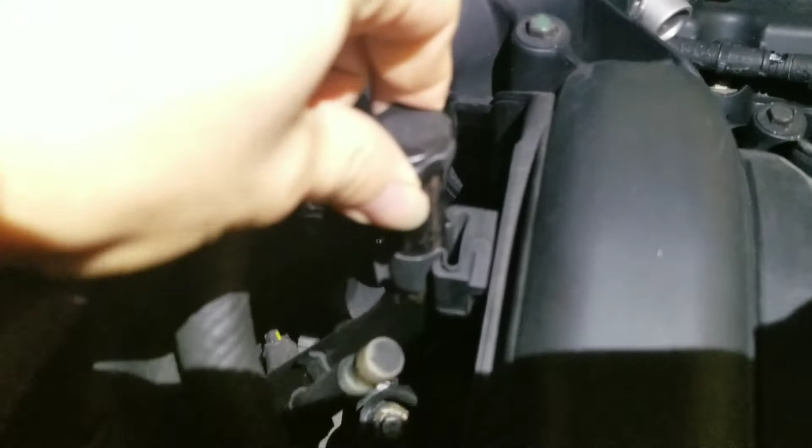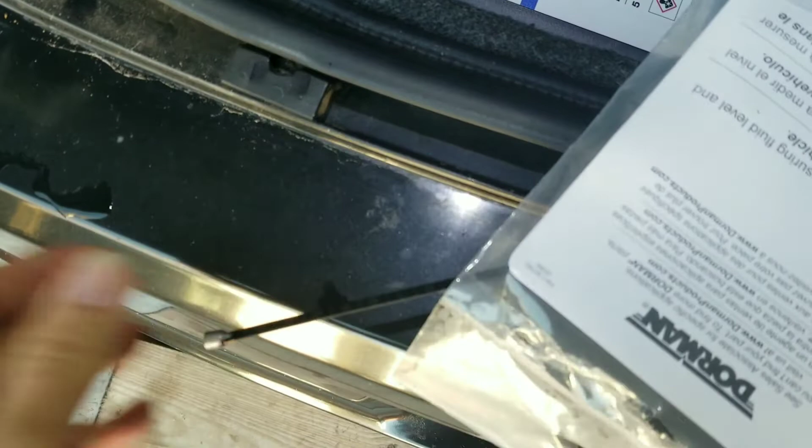Okay, today I will be replacing transmission fluid on a Dodge Charger 2007. As you can see, it says for dealer use only, so there's no dipstick, but I'm going to be using a special dipstick with measurements. Once we start the vehicle, we will be checking the measurements and filling up the fluid accordingly.

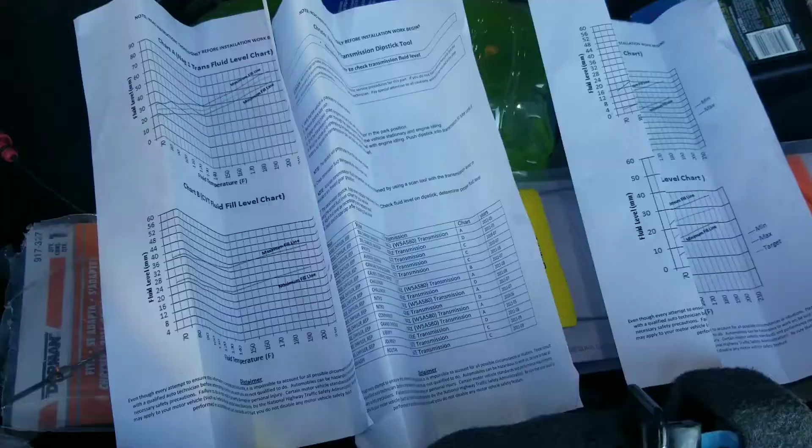By the chart - there's like 3 charts here. These are the charts, and we'll be using chart D because we have a 2.7 liter engine. Okay, so this is how it looks.

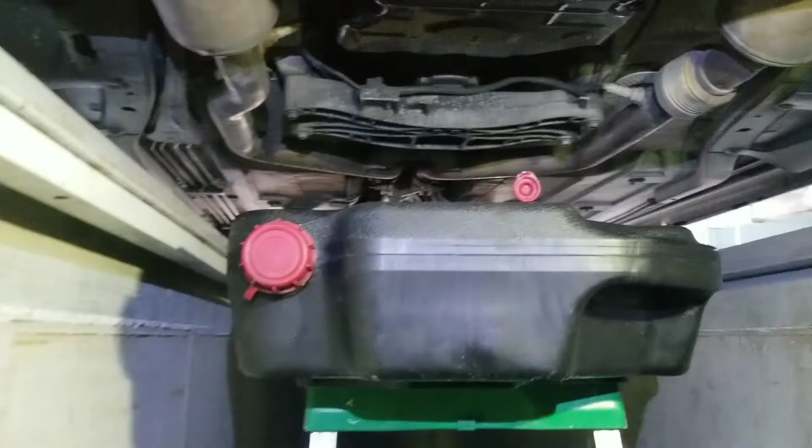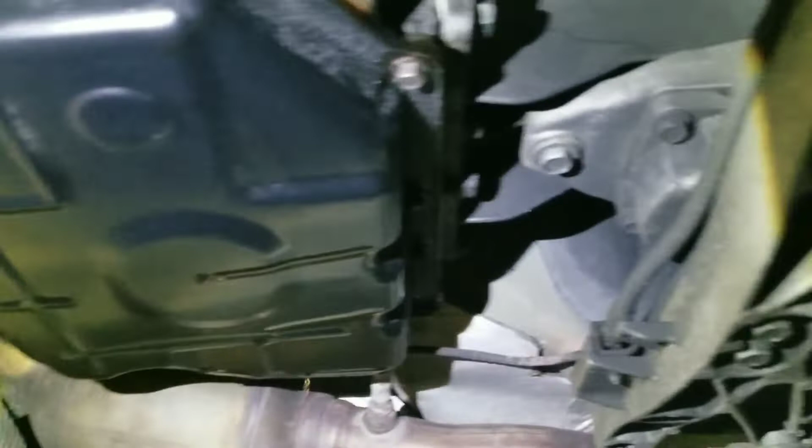Now we'll be removing pretty much all the bolts and letting it drain first into this drainage. So the reason we're doing it is because we got some issues with the transmission - it kind of slips and jerks while you're driving, especially on the highway. This could be the torque converter, but maybe we'll try replacing the transmission fluid first and see if this helps.

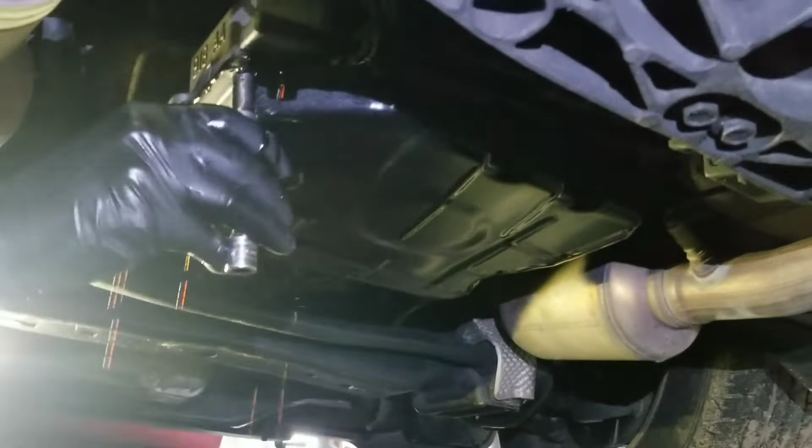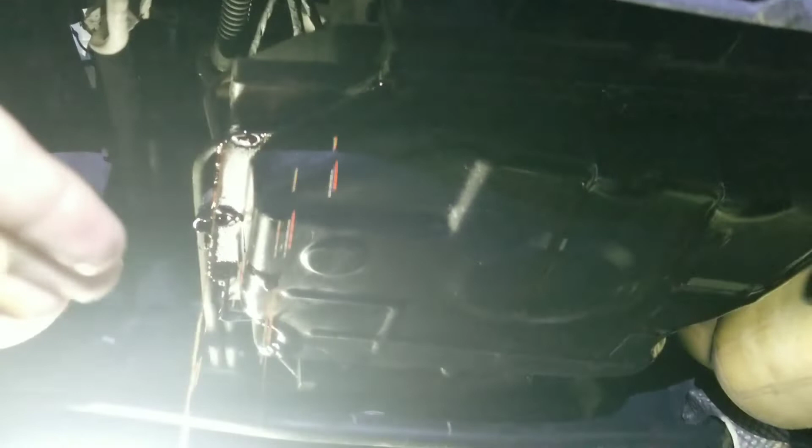Okay, so we will bring this side of the transmission pan down because it's more like tilting on that side - it's kind of tilted this way or something. Maybe not, but I think it's just easier. Okay, now we're removing the last bolt right here. Oh boy, don't spill.

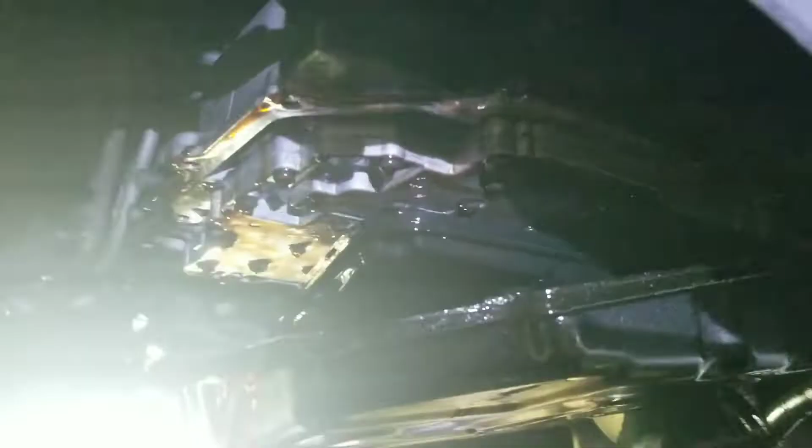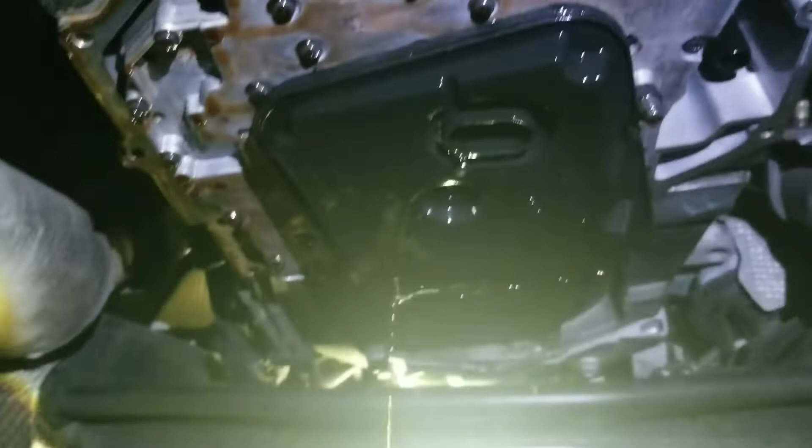And now we can start removing it. Okay, so yeah, it looks like it's dirty - very dirty, it needs replacement. This is interesting how this filter sits kind of at an angle. It's like it has to be straight, I guess, but no, I mean it's sitting right, it's just weird how it's designed.

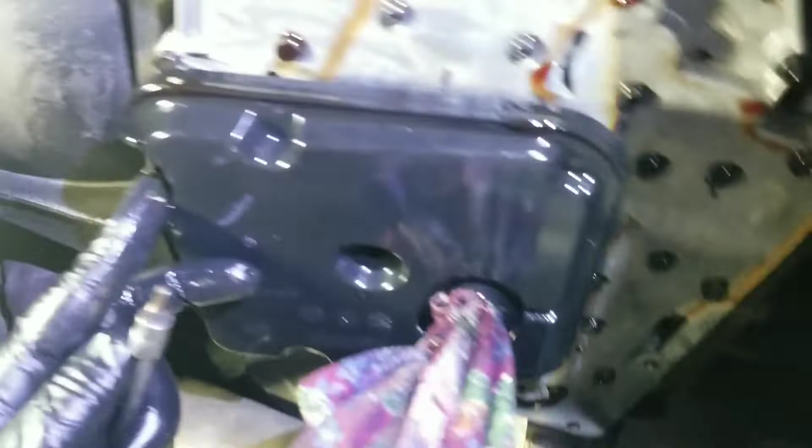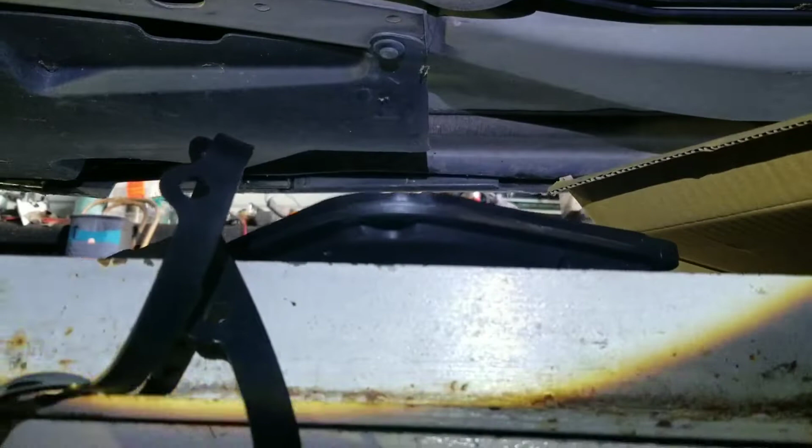Okay, now we're removing the filter - one bolt right here, and the other one's on the right side. Okay, I already removed them. And we got the new one over here. Hopefully it fits - we got it at AutoZone for like $15, and it comes with the gasket.

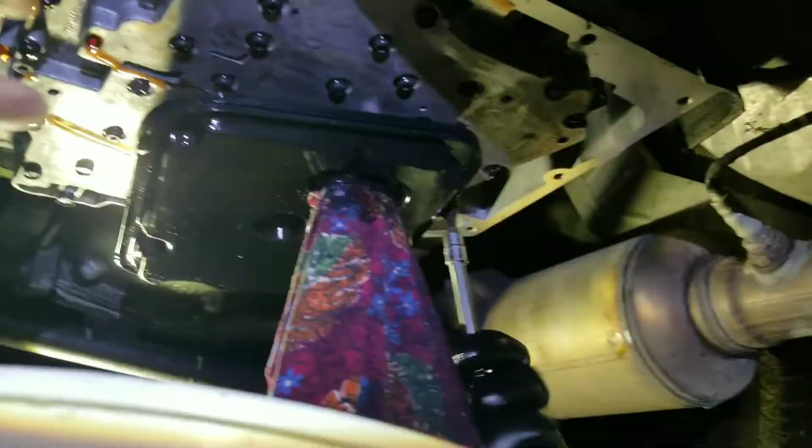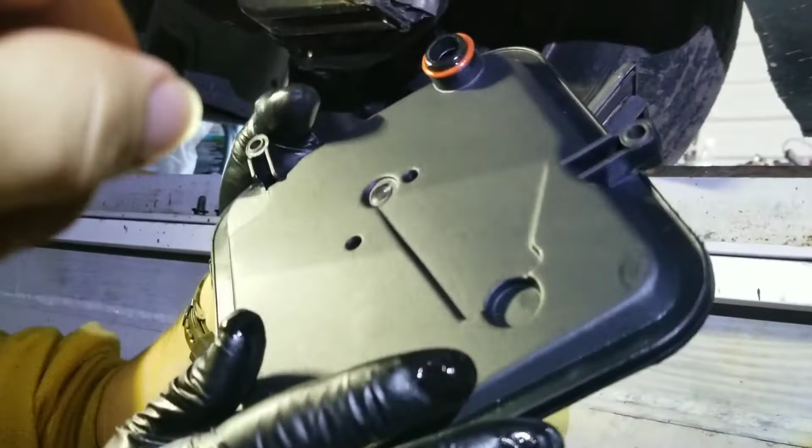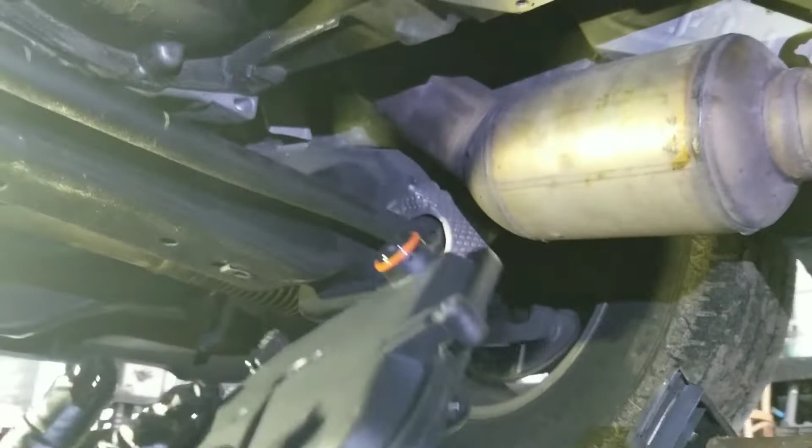Now we're dropping it - it's going too fast, can you hold the bucket with one hand? Okay, so we are installing the new one, and we grabbed some of this oil - you can use a new one. Make sure you pre-lubricate this before installation, then put it back in where it was.

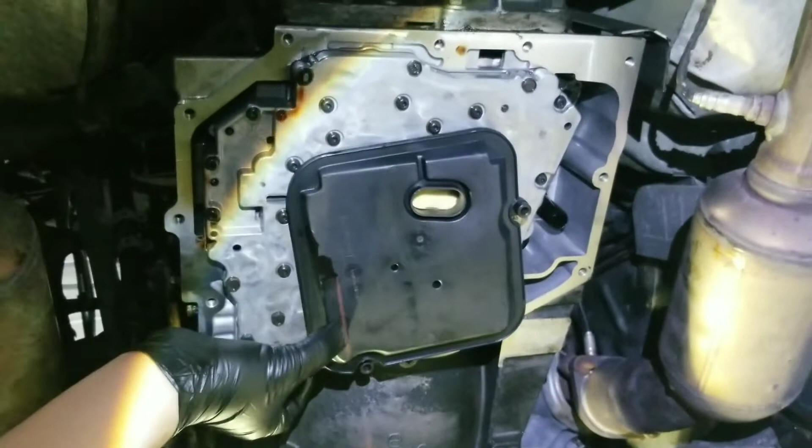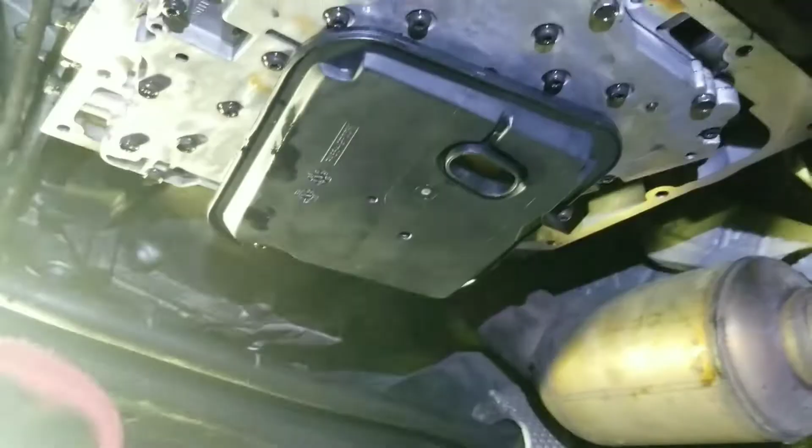Now it's kind of weird how it's located sideways, kind of. Put the bolts back in there, put everything back in - good to go. Okay, so be careful when tightening, just tighten them hand tight. Make sure you don't break them, yeah, because they're easy to break.

So wipe everything out as much as you can, and it should be good. Then let's clean the pan, and especially that magnet needs to be cleaned, the whole thing too - a lot of metallic debris. Okay, here's the gasket.

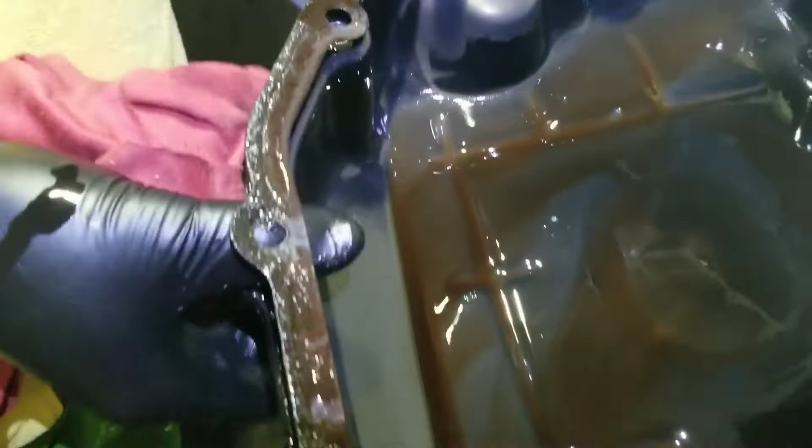It looks very bad - it was looking bad, yeah, the bolts were loose as well. I'm gonna clean it - this is trash. You want to compare with the new one? This is the new one, new gasket.

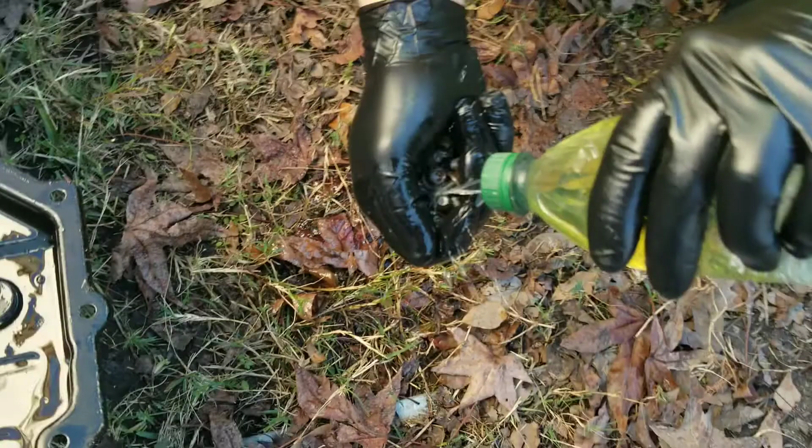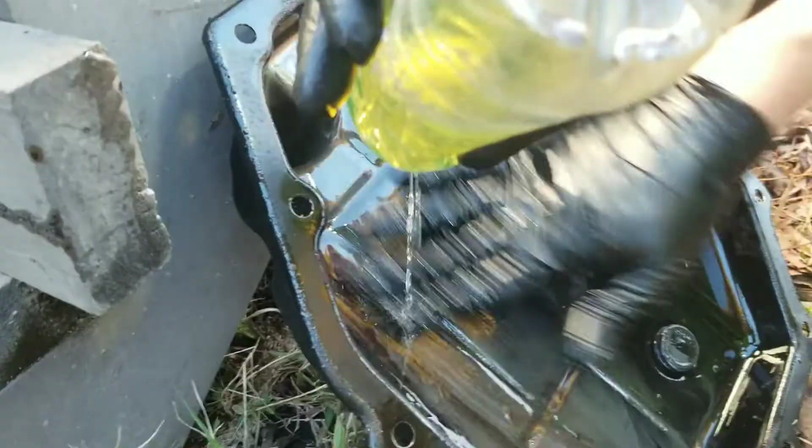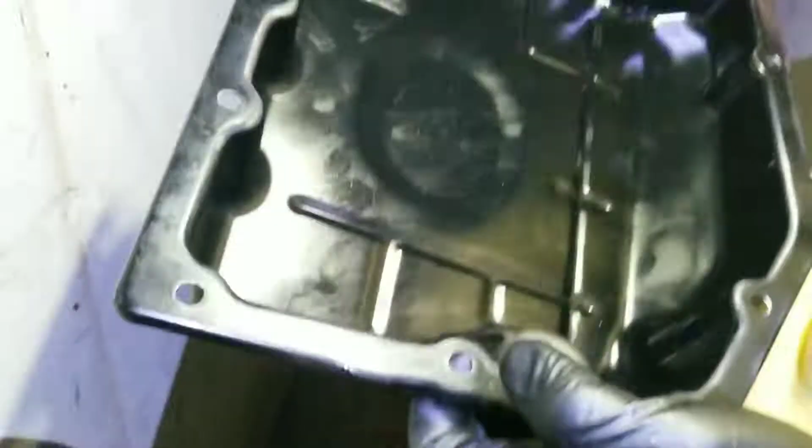Okay, now we're washing the bolts with gasoline, and we'll be cleaning the pan with gasoline as well. We removed the magnet, now we're cleaning it. Okay, the pan is nice and clean from both sides, and we air dried it. So now we're putting the seal on with the gasket on. It fits. Okay.

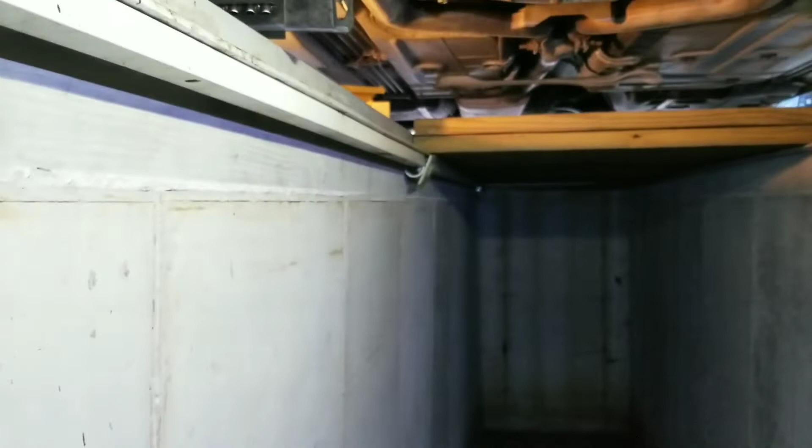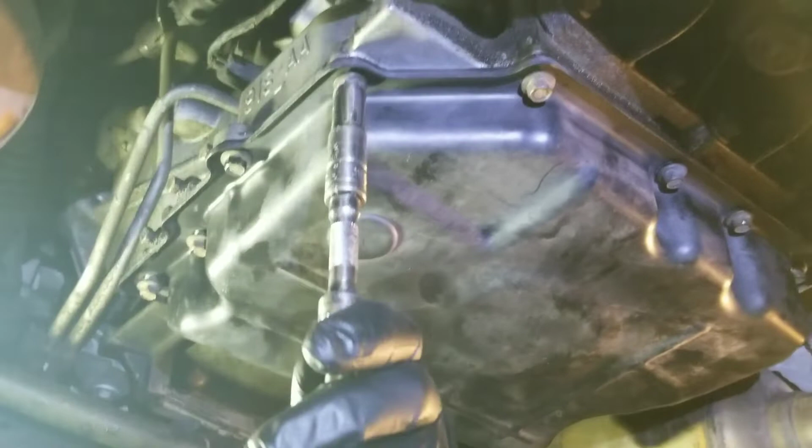Okay, we're gonna tighten this with hands, just hand tight for now, and then we're gonna retighten with the torque. We're using this kind of ratchet to tighten this, and just don't over-torque it or squeeze it. Just tighten it enough, yeah, so you don't ruin the rubber seal or the metal pan - otherwise it's gonna leak as well.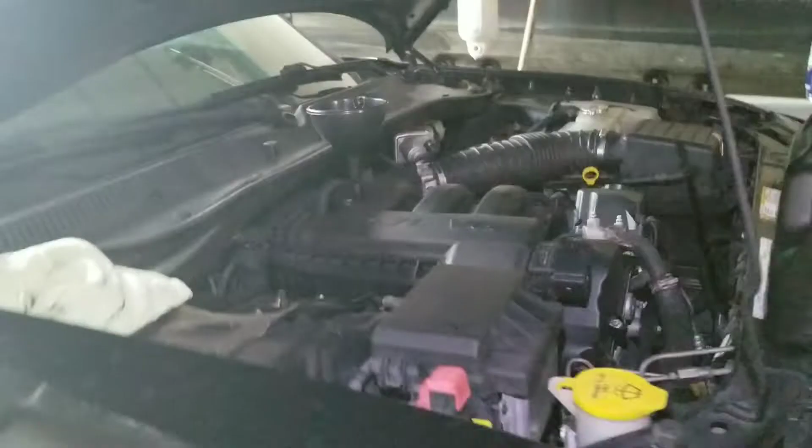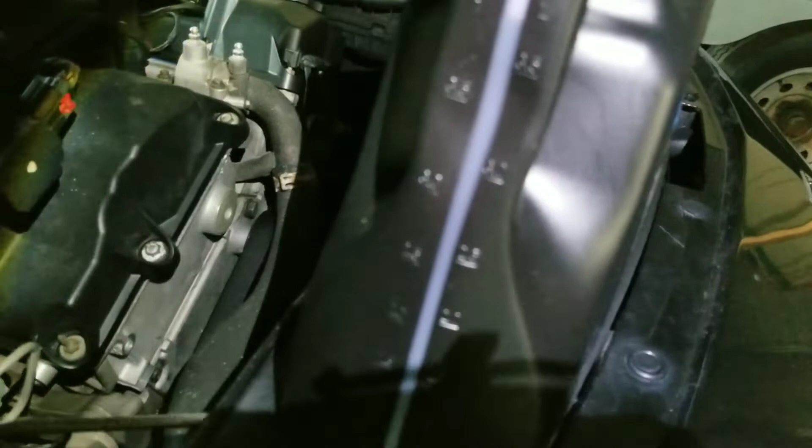Just go around and repeat the process so they're tightened the same. In the store I was told it takes like 4 quarts when doing a flush system or replacing the fluid. So what I'm gonna do is put 3 quarts in right now, and then we will check with the temperature gauge and add more if needed.

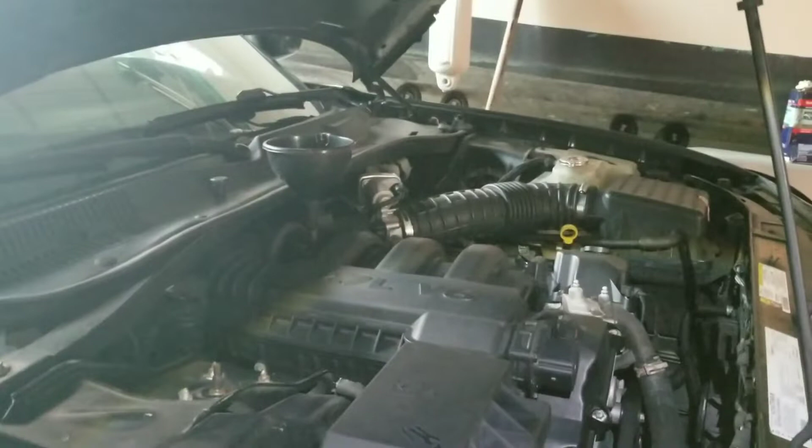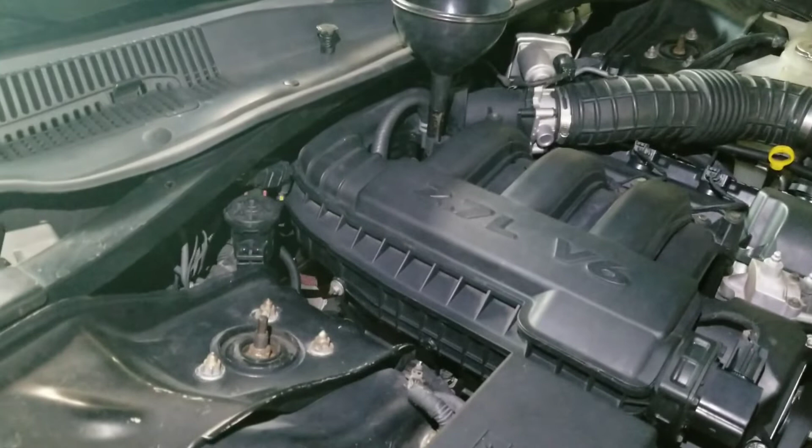Okay, we're gonna start the car and check the temperature and look at the chart that we got, and we will be measuring how much we got in there. And before that, we will run it through the gears.

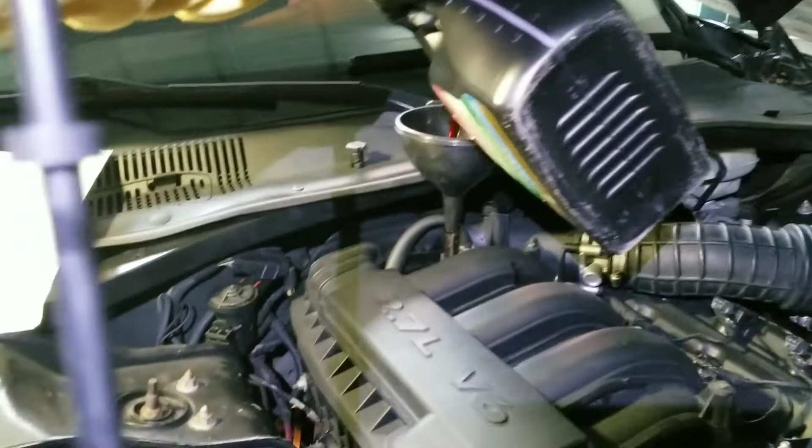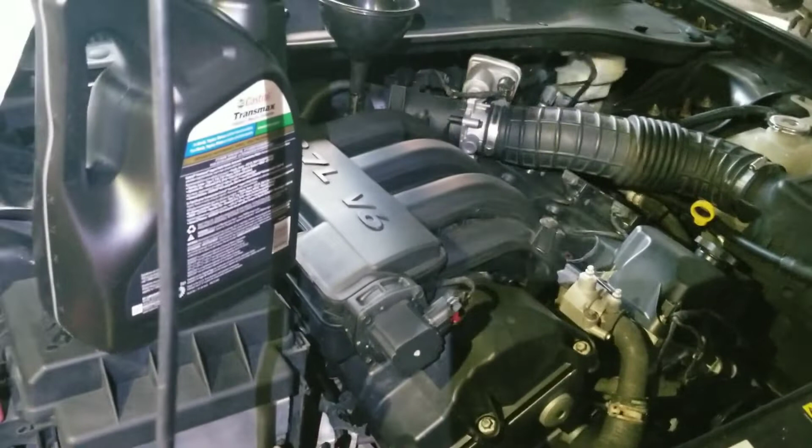Okay, we checked with the dipstick measurement and there was nothing, so we added more. Now we are left with 1 quart. So pretty much, how many quarts are in? 4 quarts are already in, right? 4 quarts per gallon, yeah.

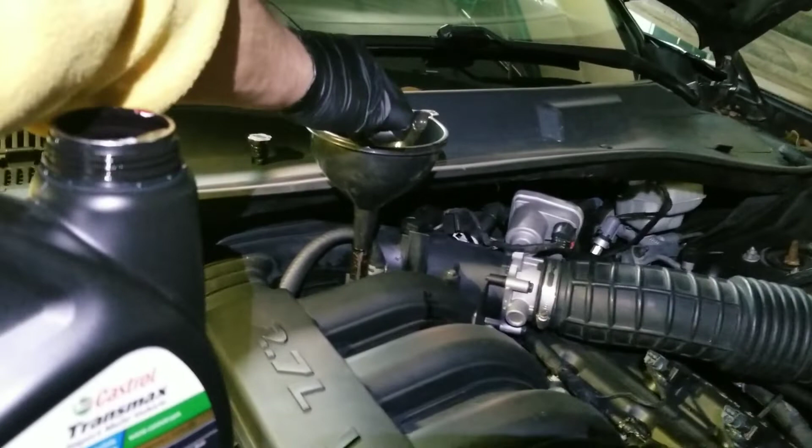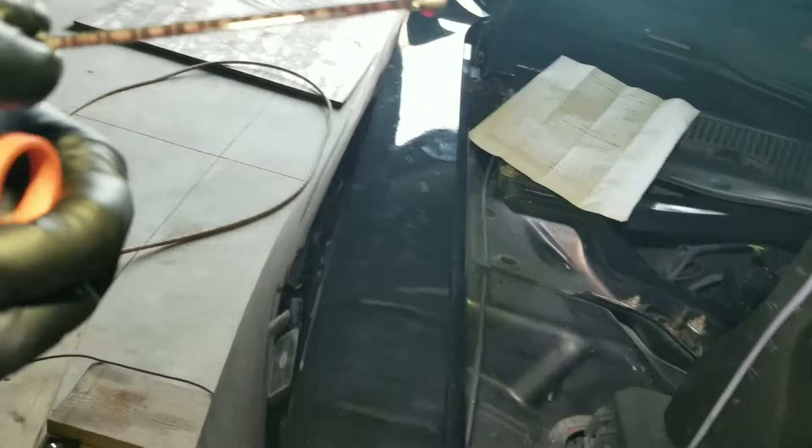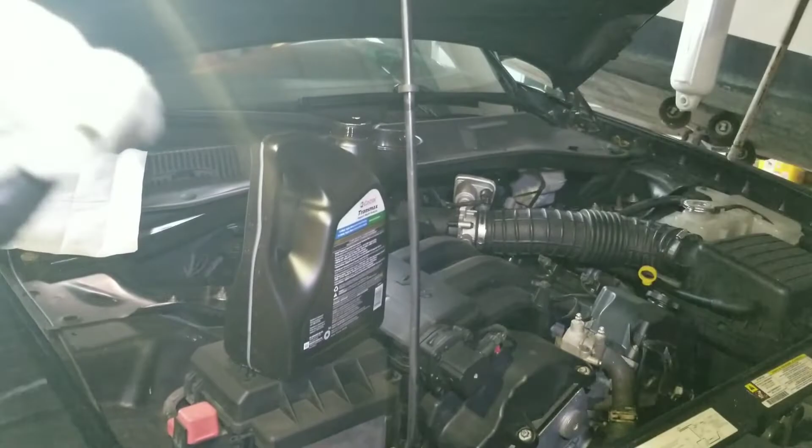Now we're just checking. This is the dipstick, it's pretty long - it's custom, we got it at AutoZone. It's all dirty, you have to let it drain first. But it's not - no, you have to wait, yeah, and probably remove that thing. Yeah.

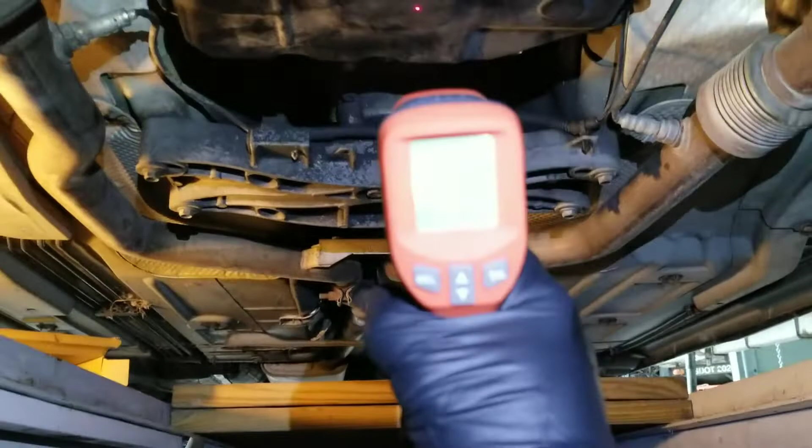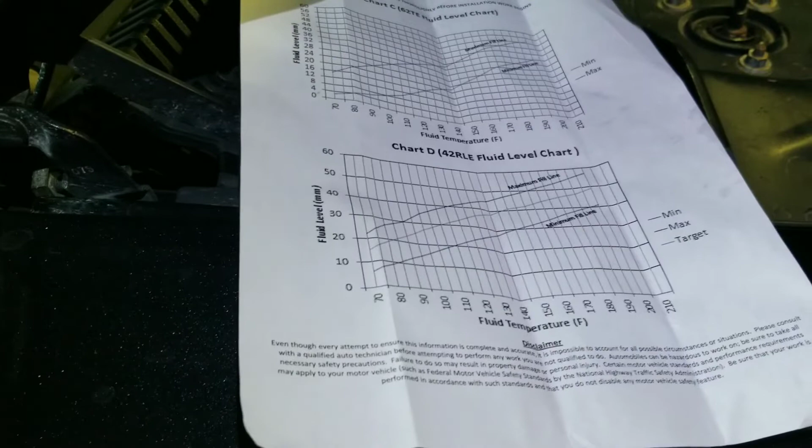Okay, so now we're checking - 74 already, Fahrenheit, and we can look at the chart. The chart shows from 70 at minimum. Okay, this is the chart - this is the temperature here, adding more, and that's how much it should be.

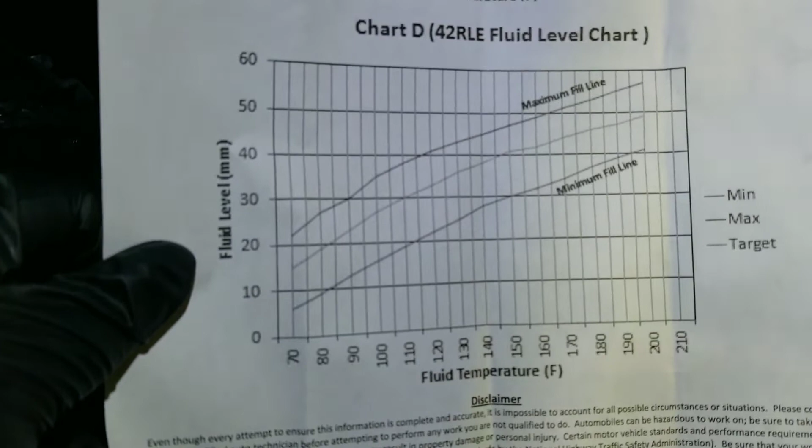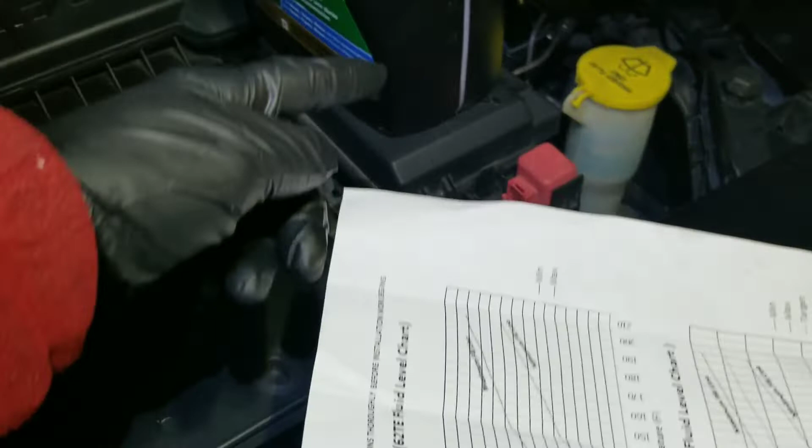So we just checked again and it was still empty. So 4 quarts are in and still empty. Did you put everything in? No, you left half a quart left. Okay, half a quart. Look, according to the chart now, we gotta bring the temperature up, and this is the level it should be on the dipstick from 0 to whatever, if the temperature is 80 right here.

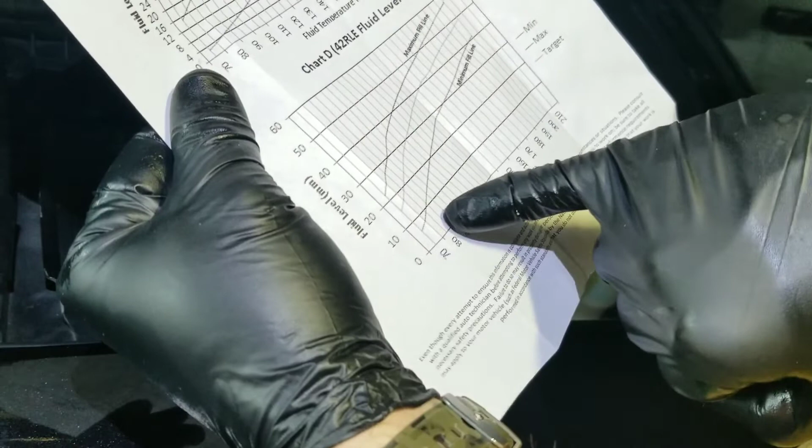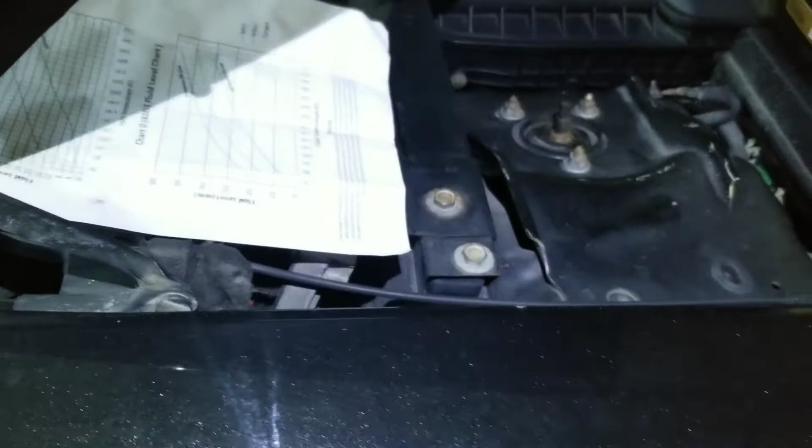So this is probably 70, 80 right here, then we gotta have the fluid level up to 30. I mean, not the level - I mean the fluid level, yeah, 30. Full must be at 30, right? Yes. So according to the temperature, that's the full and that's the minimum.

So we're checking again, and we're also running it through the gears.

Checking if we got anything. No, it's kind of full, but we gotta wait till it goes away. Kind of strange what it shows. Interesting - it's supposed to go from the bottom up, but this one shows from up and down. I guess it's still empty.

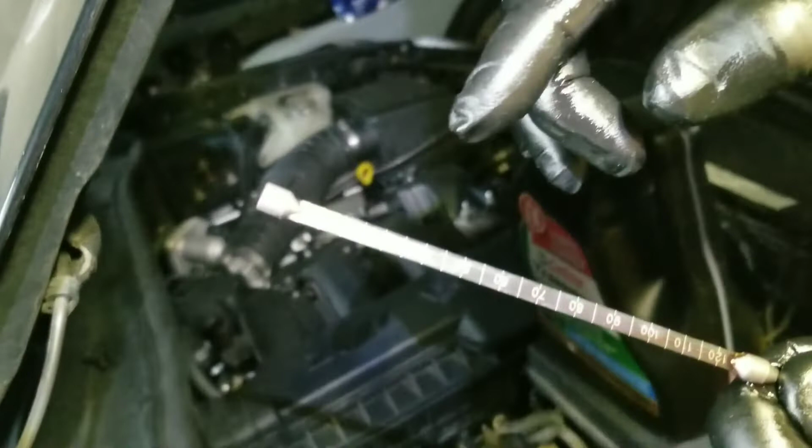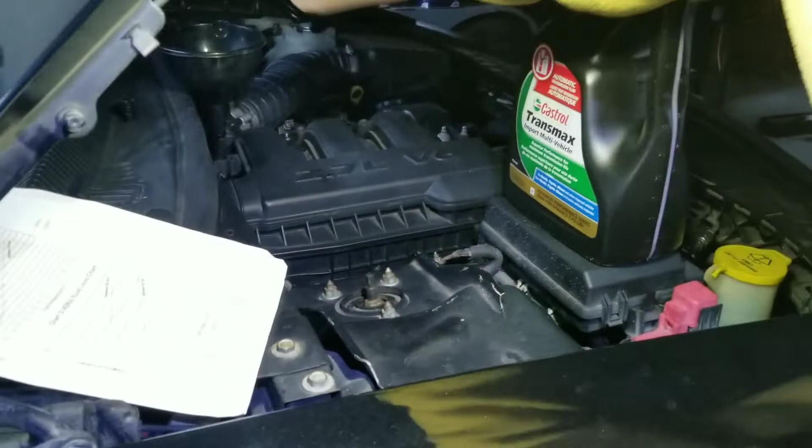I guess we gotta keep adding more. So put the whole thing in, 5 quarts. I guess maybe the oil pump or the filter was bad, that's why it did not take as much or circulate through the system. I think the other - what is it called? It should be like 4 quarts, right? But it's already 5 quarts inside there.

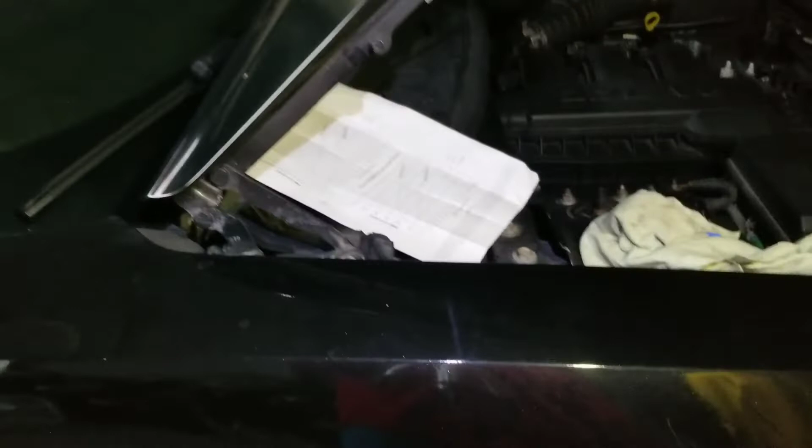Torque converter, I think, is taking all that. Could be. Now we got the check engine light on. I guess some sensors read something off. We're gonna check it.

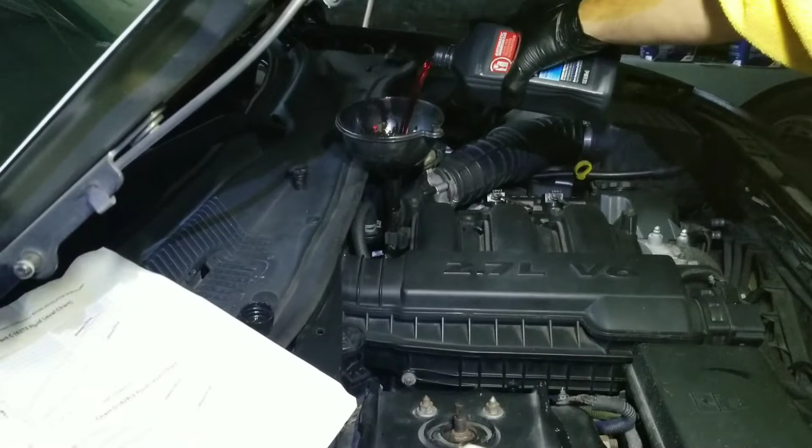So we're putting a sixth quart in because it was still empty. I guess that's because the filter was bad or something, and it was not accepting any more fluid, or we didn't have enough transmission in the torque converter, that's why it was slipping probably.

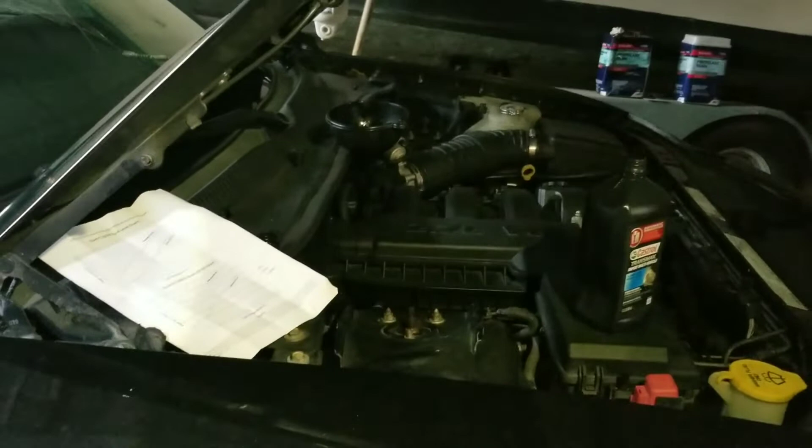Not slipping, but we will see. It was like jerking, slipping and jerking, not as well. So we will see now.

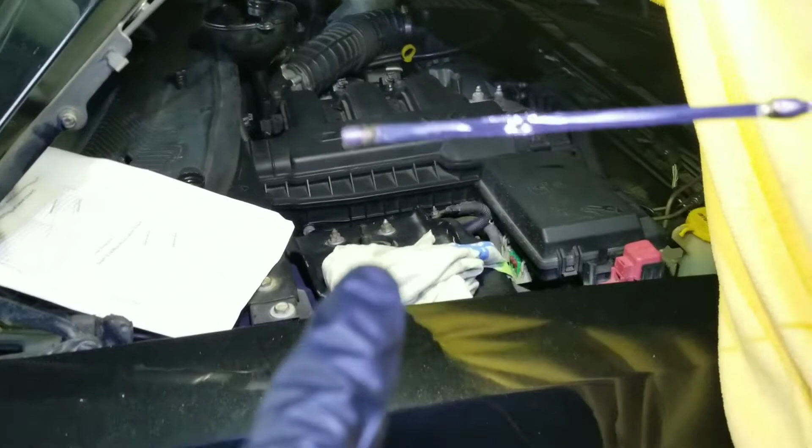Okay, so we're starting to get some right now, right on the bottom, just the bottom right here, and the rest is still empty. But before we had like 55 according to this, when the engine was running, and it was not dropping, on cold or hot - it was like the same, I think.

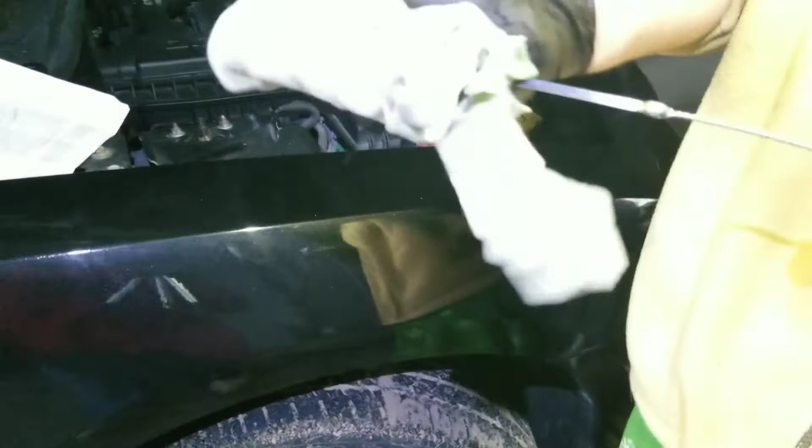Okay, we're gonna keep going now, let's keep adding, and then check the temperature again to see how many millimeters we're gonna go off. So since we got 6 quarts in the car right now of brand new fluid, now we're just checking how much we drained.

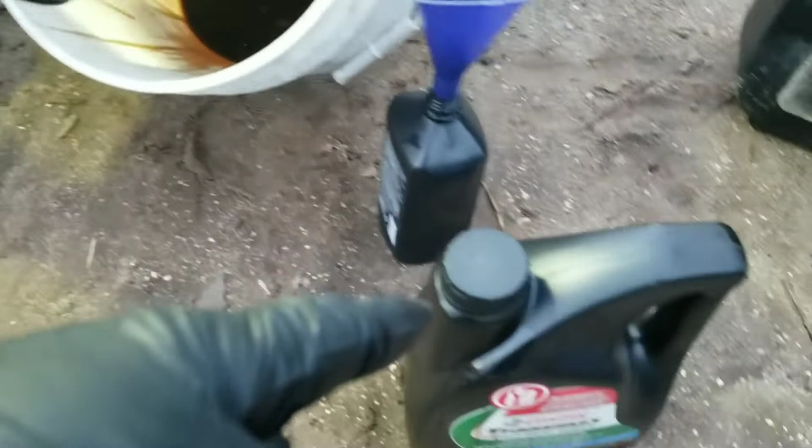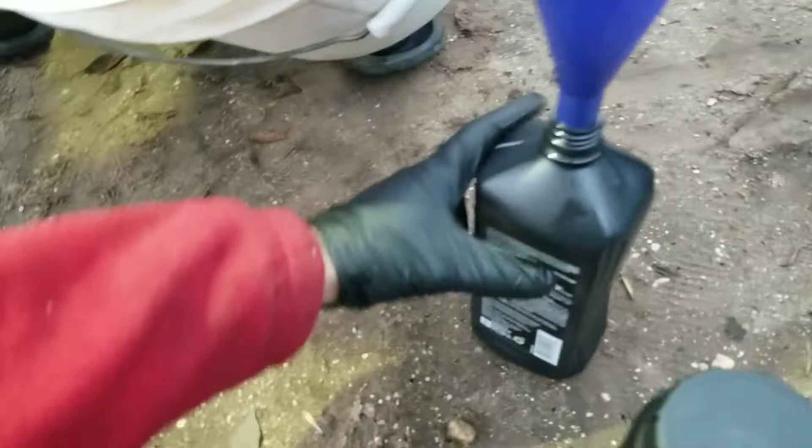So we got this full. As you can see, it's like full to the top, and we got almost this one full, and we're using like how much is left. We're gonna keep adding, just add this, and we just want to see how many quarts we drained, because we still need to add to the car.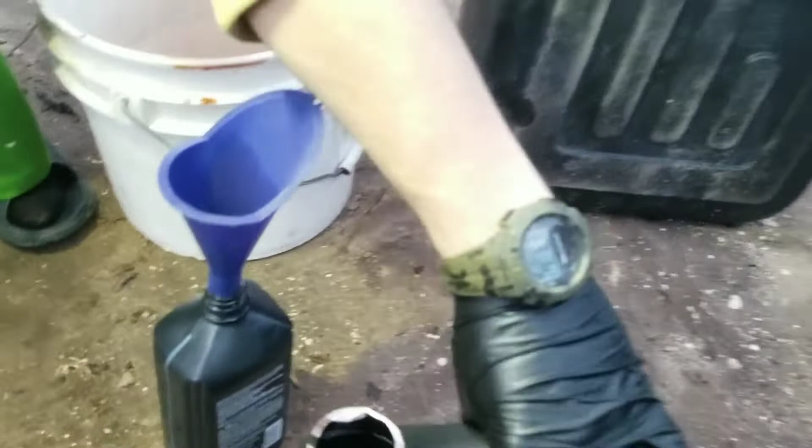So pretty much 6 quarts, maybe 6.5 we drained, right? That's how much is left. There's no more drained, it's full to the top. Yeah, so like 6.5, I'll have some space I guess. So we gotta buy more and add to the car.

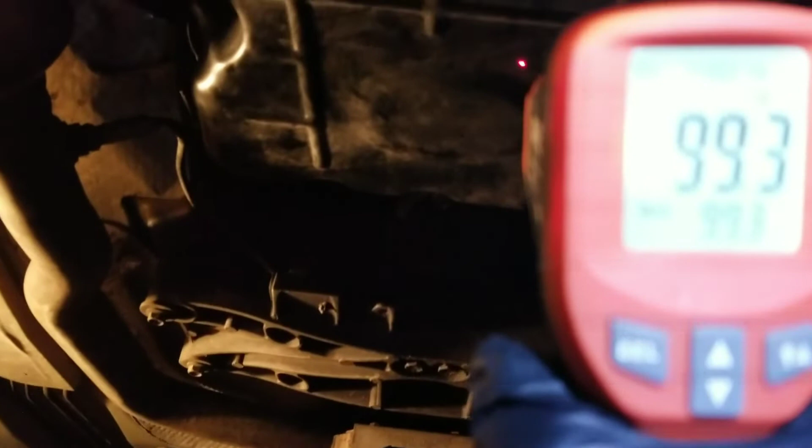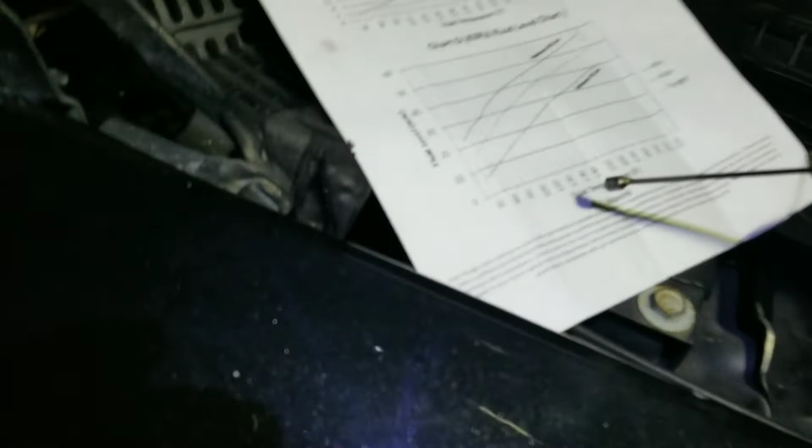Okay, so now we're checking. It shows 99 Fahrenheit, 98. Now let's look at the chart. So the temperature is almost 100, full temperature. We're gonna go almost 100.

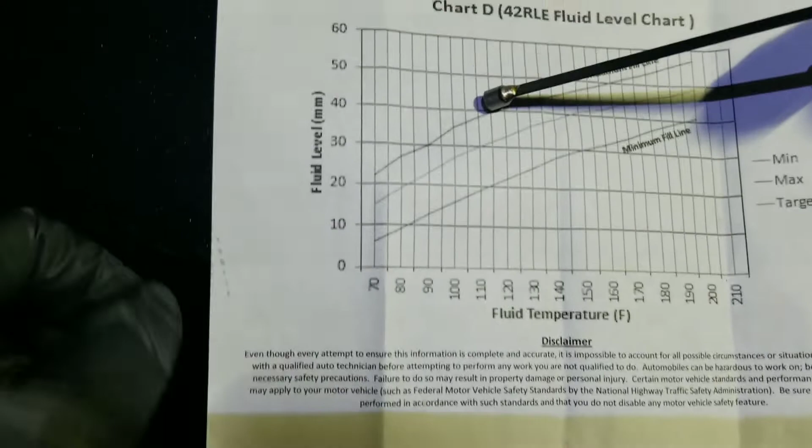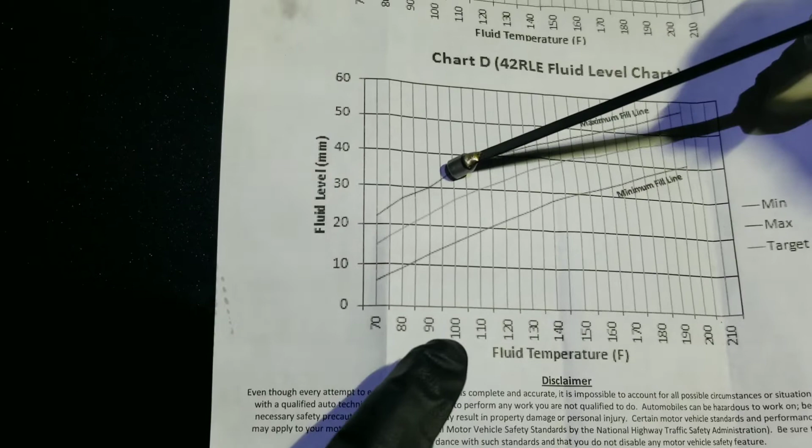So we should have in millimeters maximum around 40, no more than 40. 30, 35, 38, 37, 35. Around 35, and about that.

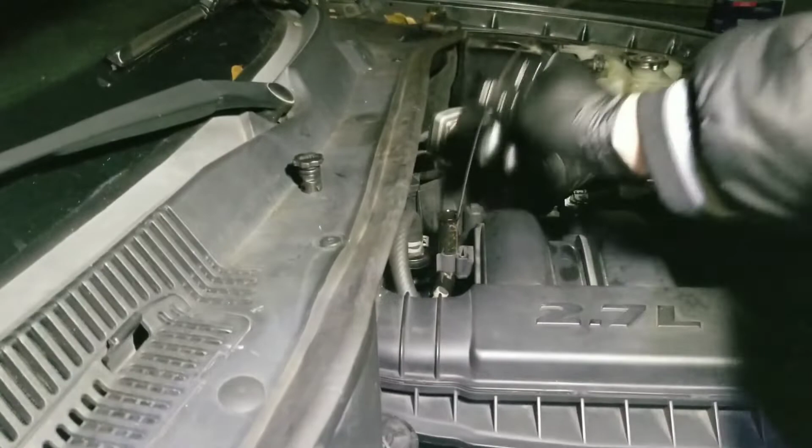So let's go ahead and do a final check. We added another quart, so 7 quarts. So now we are checking - we are just slightly above.

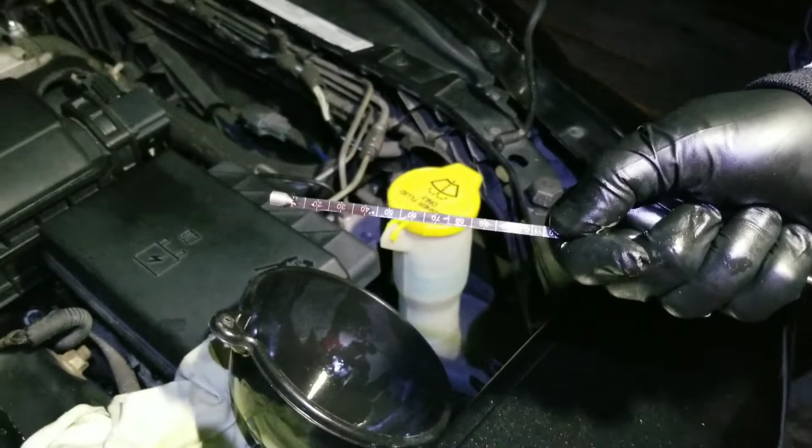Can't focus the camera, can you focus now? Won't focus. Okay, that's better. So it's 40, right? 40, yeah, almost 45. So this should be good - it was actually 40.

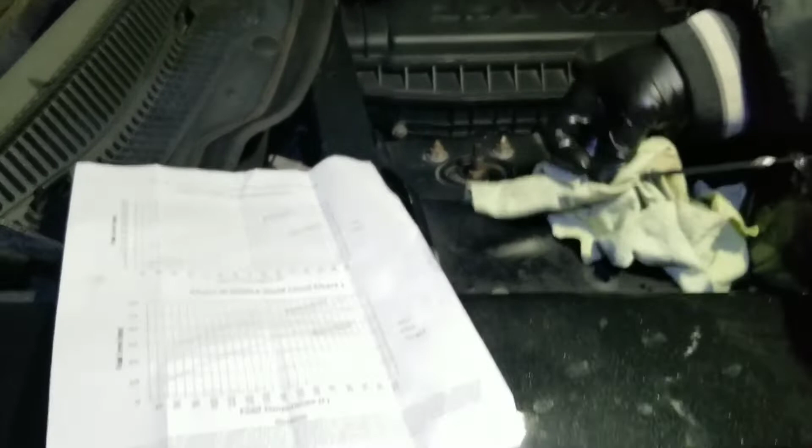It's climbing on there, that's fine. So we ran through the gears and stuff like that. Let's go for a test drive and see how it works. And put the plug back in.

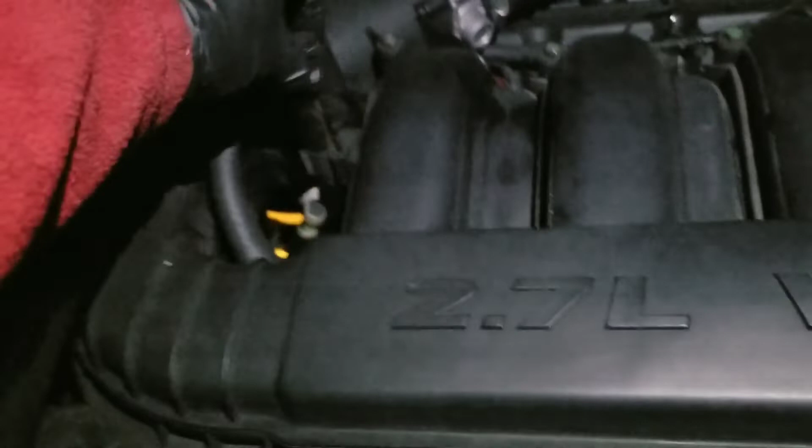So we took the car for a test drive, and yes, it drives better, but it still has this same sound, like a jerking, right on the bottom. You feel this on the bottom - I guess it's a torque converter.

Try to go 40. I'm going 45, okay let me go 40. Dropping. 40. Transmission shifts good, no issues.

See, oh okay, here - you hear that? It's like going on the side of the road. Yeah, the same feeling, it's a torque converter, I guess so.

So guys, that's how you replace the transmission fluid.

There we go, we hear it again. Yeah, there we go. So, but it shifts good and stuff like that. Okay, again, we hear this - speedometer jumps though, look at that.

Speedometer goes up and down, look at that, if we get to see again. Look at the needle, see, the needle jumps back and forth. The RPMs? No, the miles needle. Oh yeah, the miles. So we do it here.